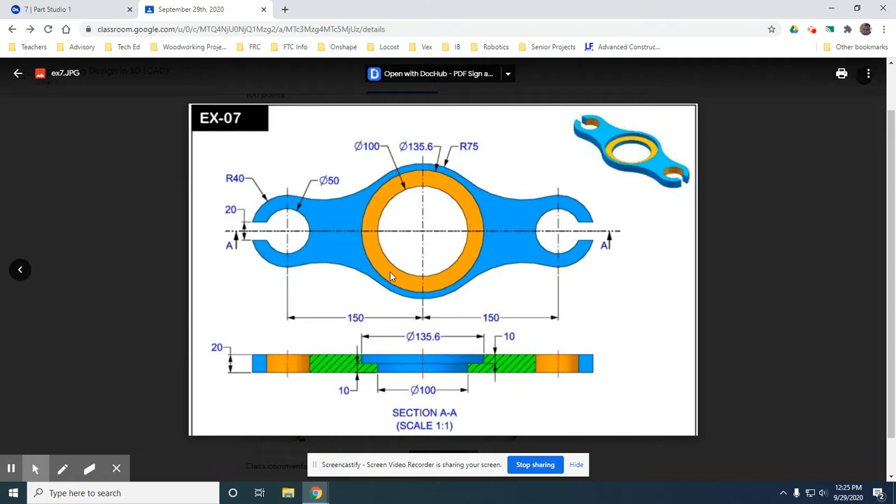So let's get started. I'm going to hop onto Onshape. I'm going to create a new part studio for exercise 7. We're going to create a sketch on our top plane.

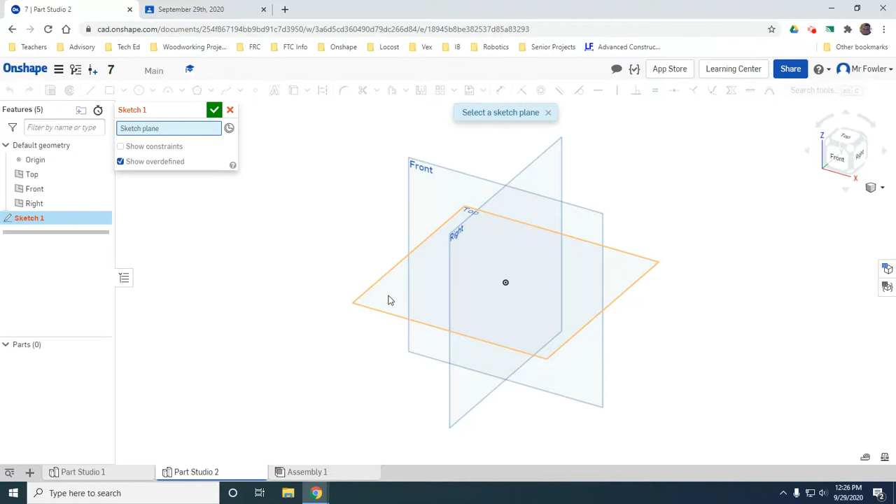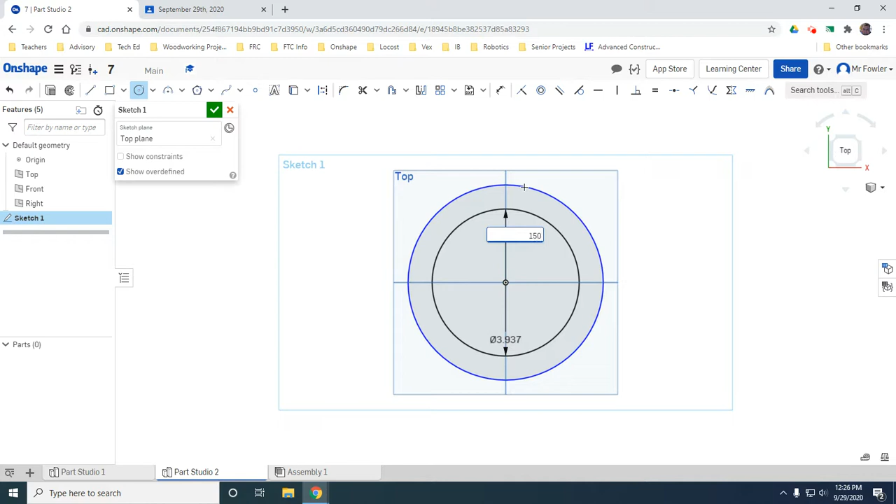And now we're going to get drawing. So I'm going to draw a circle at my origin, and that circle is going to have a diameter of 100 millimeters. My second circle here has a diameter of 150 millimeters, and that's showing us a radius of 75.

Okay, that third circle I'm not going to draw yet, which will make sense in a second.

From here, I'm going to draw another circle off to the left-hand side. I'm going to make sure it's horizontally constrained from here over to the left, and I'm going to give that a measurement of 50 millimeters.

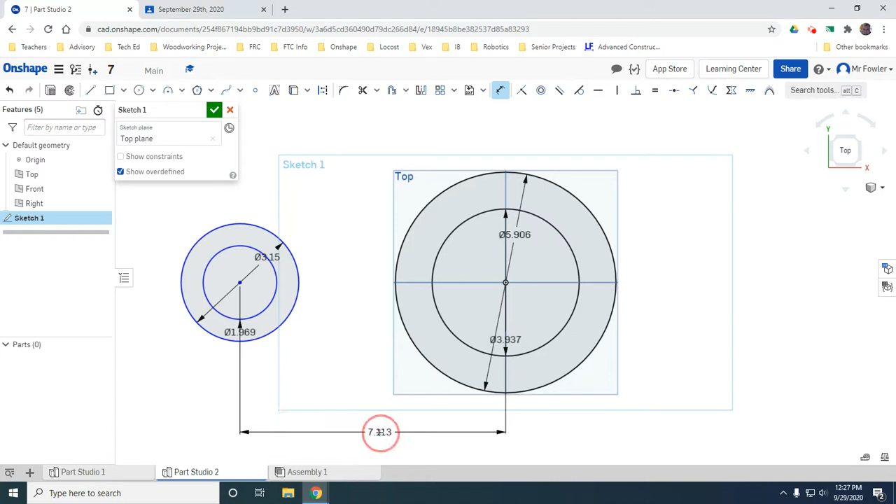I'm also going to draw another circle here, again coincident to this circle, with a diameter of 80 millimeters. And now I need to set my distance between this center point and this center point. So I use my dimension tool, click on the center here and the center here, and this should have a length of 150 millimeters.

That snaps these both in place. Okay, so now we need to do an arc from this circle to this circle. So we have a 3-point arc, and if we click here and we click somewhere up here and we pull down this way, we get an arc.

Okay, and the radius here doesn't really matter. It's not important. But what we want to make sure is that this arc is tangent here and tangent here, because if it's not, you're not going to end up with a shape that looks right.

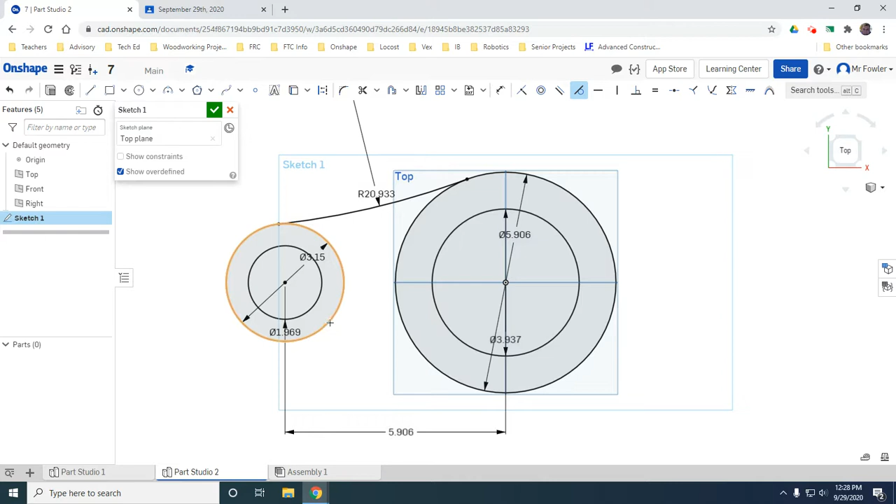The other way you could do this is, I'm going to delete this. I'm going to draw a very large circle with a diameter of 300 millimeters, and then I'm going to make this circle tangent to here and here.

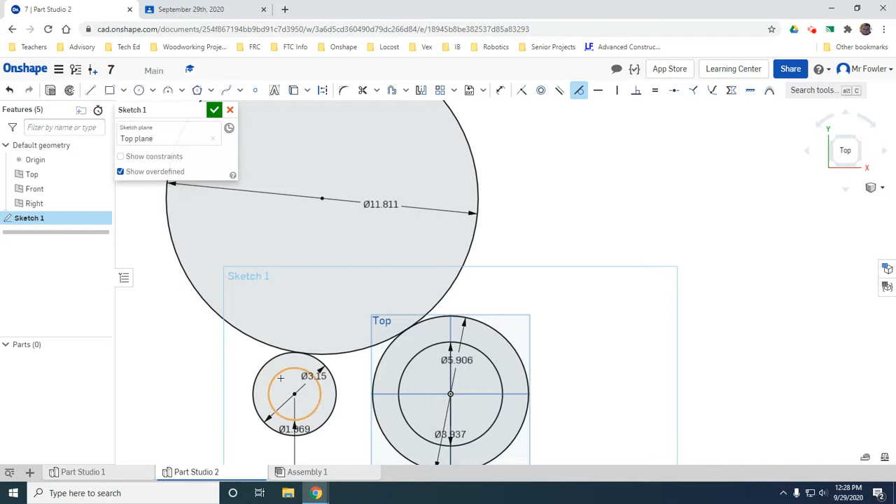So now I'm going to use my trim tool. I'm going to trim this large portion away. So now I need to draw my little slot in this circle.

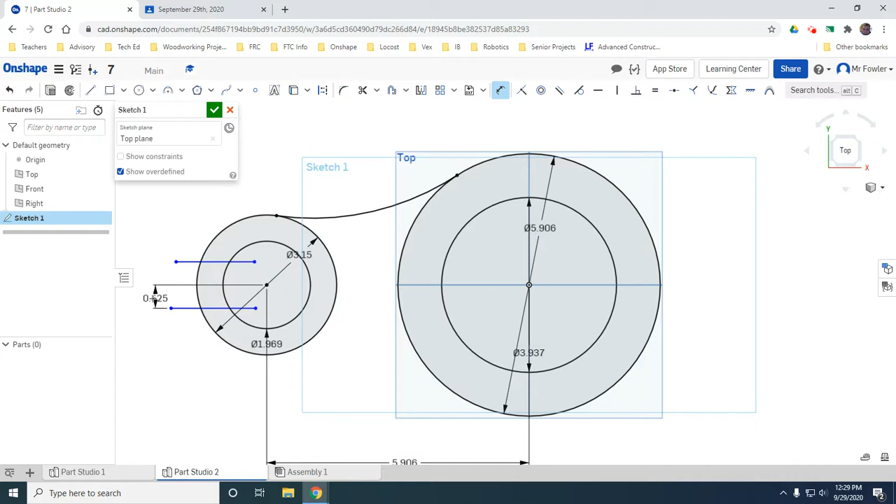Okay, so it's 20 millimeters. So I'm going to draw a line like this and another line like this. And I'm going to use my dimension tool, and I'm going to dimension from this line here to my center point like this. Okay, so that's 10 millimeters.

I'm going to do the same thing. I can actually set these lines, go to both lines, and I'm going to make that 20 millimeters. Okay, so now I have the ability to do this. I'm going to use my trim tool. Just going to spend some time cleaning this up.

All right, so now we need 2 more lines, and they're going to be construction lines. The construction lines are going to go through my horizontal origin as well as my vertical origin. All right, so now I have that.

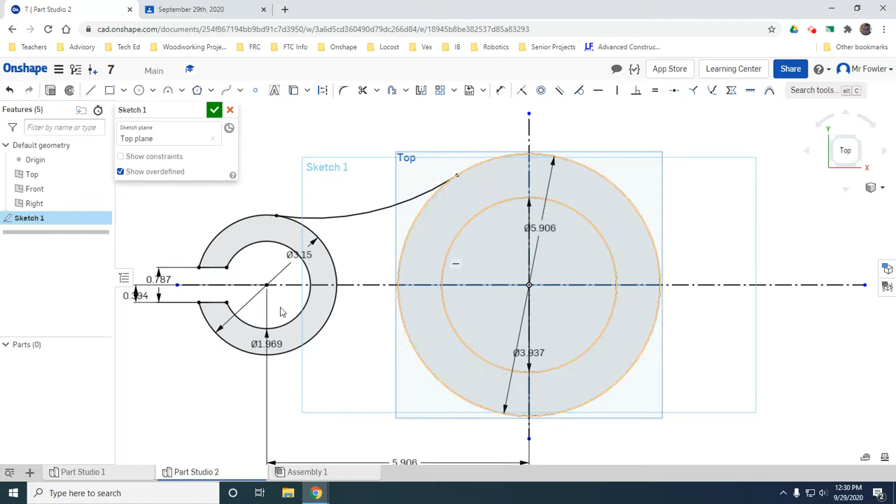And if you're feeling really ambitious, you can actually go through and get rid of all of this, like so. So what we're left with is just this, okay? So now I can use my mirror tool.

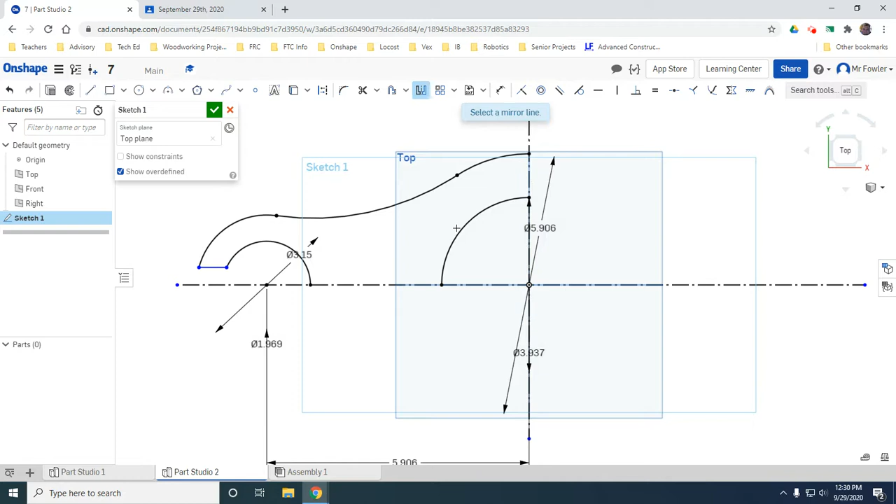I can select a mirror line, so let's do vertical first. I'm going to select my mirror line. I'm going to zoom out a little bit so I can highlight everything. I'm going to select all of that. That's going to flip it over my y-axis. So now I'm going to press escape.

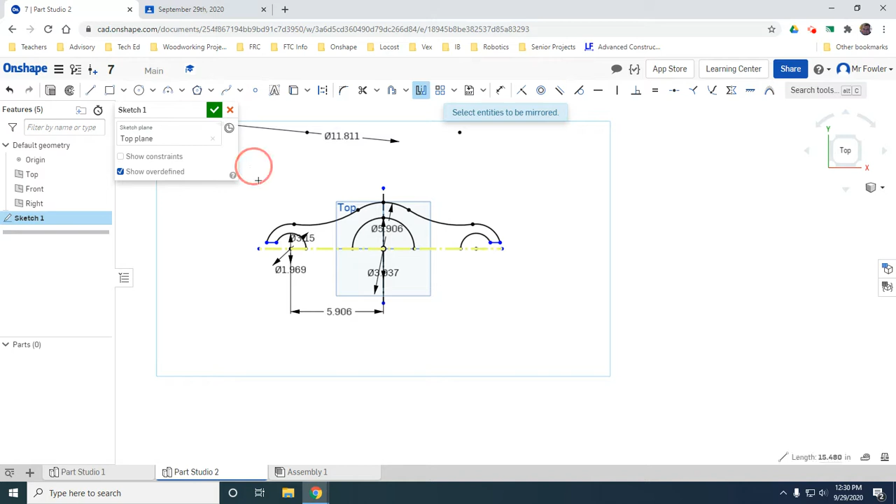I'm going to select my mirror again, select my horizontal axis, and all of my parts, and that will flip it that way. So that is my sketch. Okay, so I'm going to press the check mark.

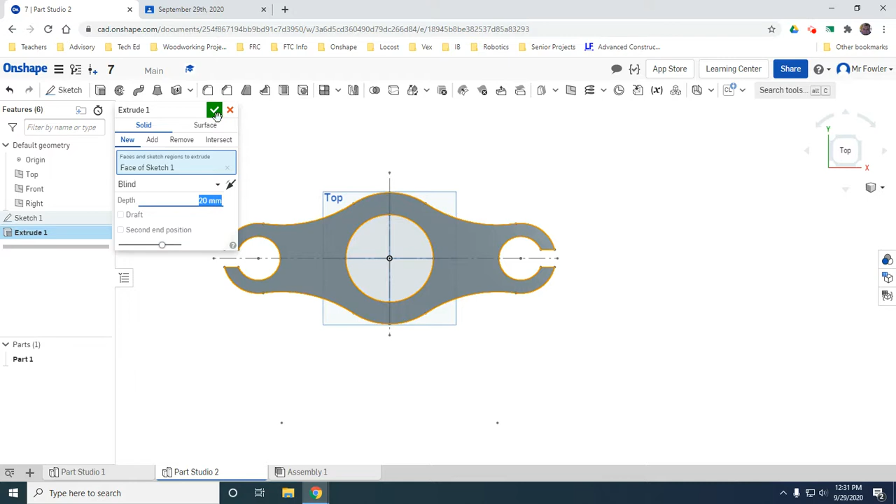So now I have my shape. I can extrude that by 20 millimeters. Okay, I end up with that.

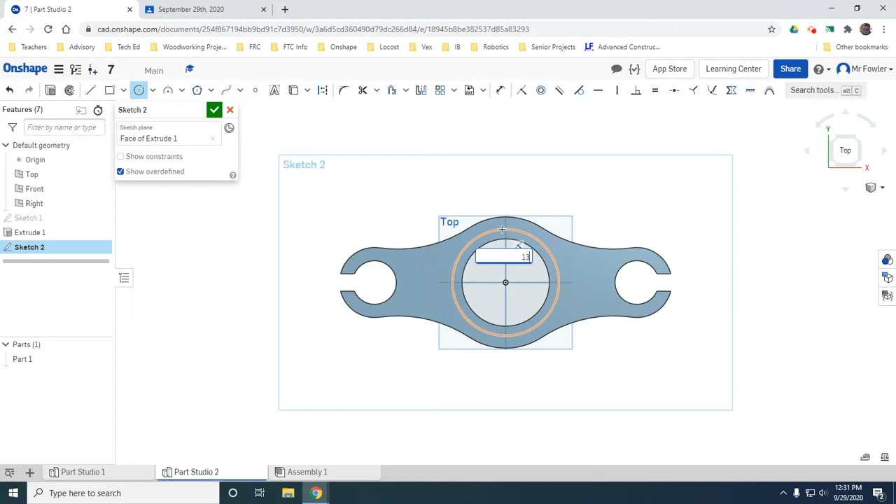And now I can put another sketch here for my counterbore circle. Do a circle here with a measurement of 135.6 millimeters. I will use my extrude tool, do a remove extrude, but remember we're not going all the way through, we're going through a depth of 10 millimeters, and that gives us our finished part.